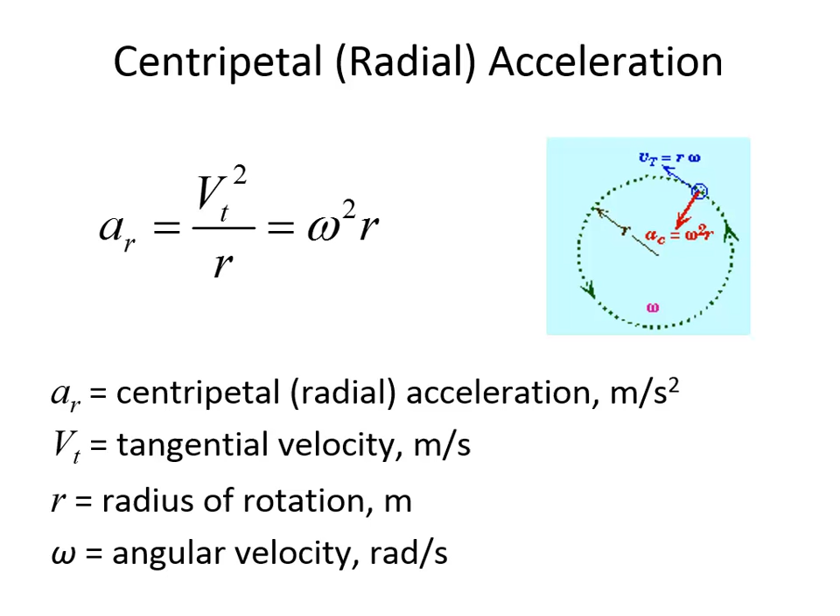What would your conversion from meters per second squared to radians per second be? You're thinking in terms of this earlier slide? We don't actually use the radial acceleration in this problem. In this problem, I have g, the elevation, and then just the radius squared. The radius that we used of 0.1 meters is the radial distance from the axis of rotation over to 2.

Now, we get 22.15 radians per second. If we wanted to convert that into RPM, then we would divide by 2 pi radians per revolution, and then we would multiply by 60 seconds per minute, and that would give us 211.5 RPM. So 22.15 divided by 2 pi gives us about 3.5 revolutions every second, multiply that by 60, and that gives us 211.5 revolutions per minute. So it's spinning around really quickly.

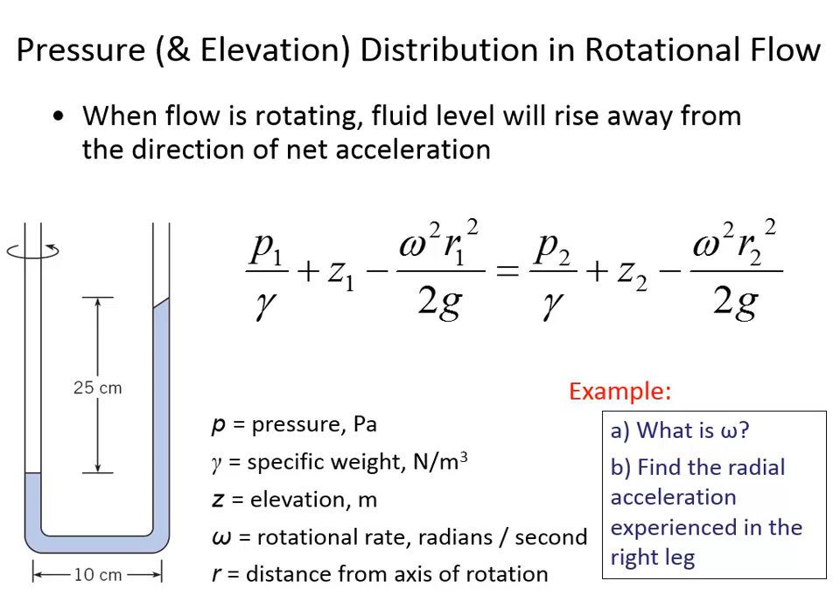Even though it looks like the wind turbines are moving pretty slowly, the radius of those blades is so long, and you maybe have seen them driving down the freeway before, on a truck. They can be 100 yards long easily. At the end of that really long radius, even though it seems to be rotating slowly, the acceleration is really high, and so the reason why it can fling chunks of ice really far and into a house potentially is because the acceleration is really high. And the radial acceleration formula tells us that it's not just the rotational rate, but also the distance from the axis of rotation that develops that acceleration.

So back to these U-tubes. Here's an example I'd like you to take a crack at. We've got an enclosed U-tube. Now this is a little bit different from the open U-tube. Remember, in the open U-tube, what could respond was the water elevation could vary as it was accelerating. Now in this instance, the water elevation is fixed. This U-tube is full of water, and so it starts to spin. And so now the water elevation isn't going to respond to the spinning, but the pressure will.

So I've told you a couple of points that we're going to be selecting. We've got location L and location M, and that's what you're going to select as 1 and 2. It doesn't matter which is 1 and which one is 2. We know that the pressure at L is 2.75 kPa, and the distance from the center of the axis of rotation over to L is 38 centimeters, and then from the axis of rotation to location M is 13.3 centimeters, and then the vertical deflection between the two is 12.5 centimeters.

And so in this case, I'd like you to try and calculate what is the pressure at M, and there's a couple of tripping hazards on this problem. The first is that the specific weight of the liquid isn't just going to be 9810 newtons per cubic meter. It's given that the specific gravity of the fluid is 0.85. So you're going to need to calculate a different gamma for this than the gamma for water. And then the other tripping hazard is the fact that the rotational rate here is defined in terms of RPM, and so you'll need to convert that into radians per second. So see if you can substitute everything that's known into the formula and calculate the pressure at M.

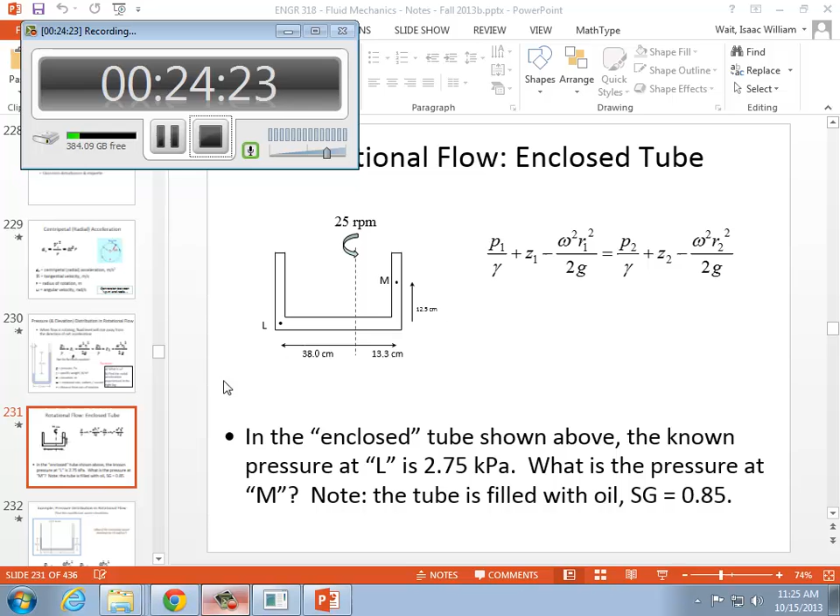All right. In the example, we start off by rearranging the rotational flow equation to solve for P2. Now I've said let's let L equal 1 and M equal 2. And we know the elevation Z1 will be 0, and Z2 will be 0.125, since location M is 12.5 centimeters above location L.

R1 will be 0.38 meters because it's 38 centimeters from the axis of rotation out towards location L, and 0.133 meters for R2. Converting the rotational rate from RPM, 25 RPM into radians per second, it's 2.618 radians per second. Now we can substitute in the unit weight of the liquid here, which is 8338.5 newtons per cubic meter because of the specific gravity that's given, and take into account all the other factors here.

Ordinarily, the pressure would be quite a bit different, because if it was just because of hydrostatics, remember, all we'd have to keep track of is the delta H times gamma to find the pressure difference between L and M. It would just be a matter of delta H times gamma. But here, location L is further away from the axis of rotation than location M. And so part of the reason why the pressure is higher at L than it is at M is because it's deeper down into the fluid.

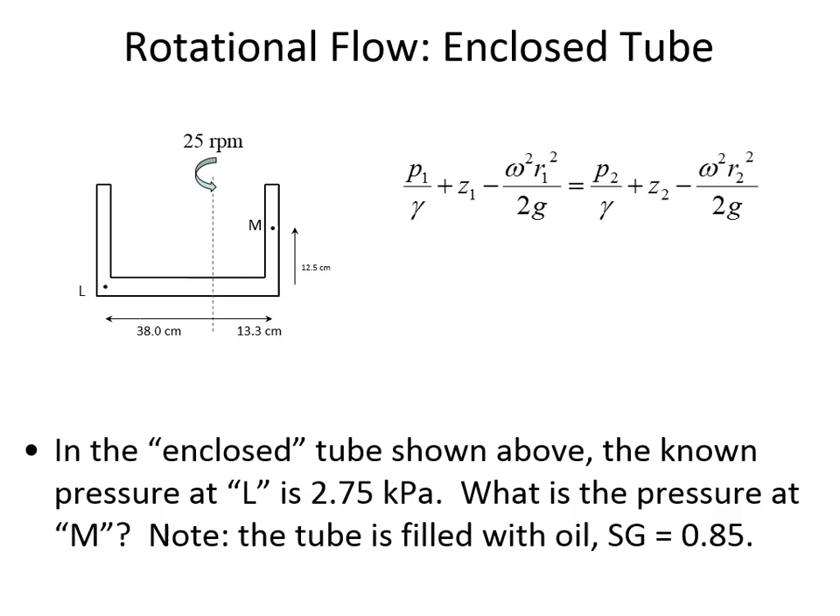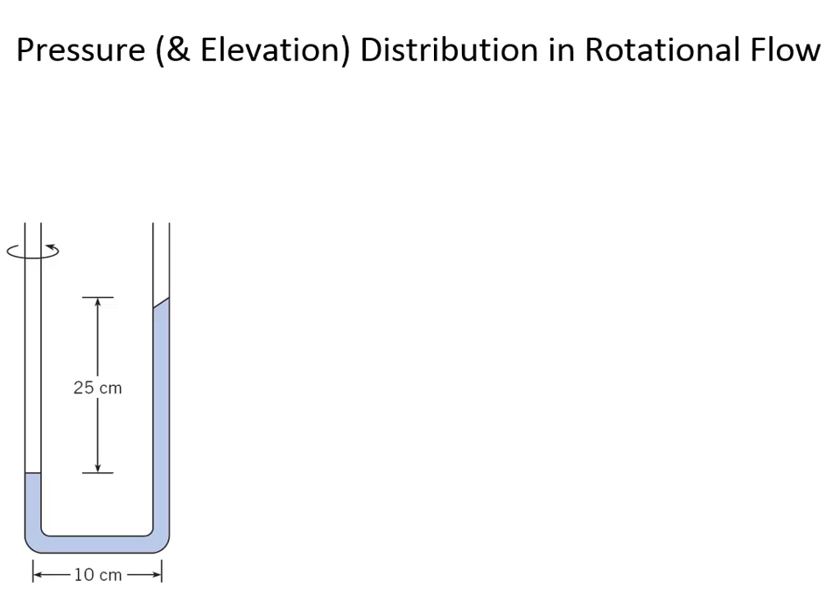So both of these first examples were relatively easy because either the liquid couldn't respond its position, as was the case here, or in the earlier example, there was a certain deflection, but the deflection didn't go beyond the tube's capacity to handle it. In this next example we're going to take a look at, we want to find out what's the equilibrium elevations. And so here the unknown is the Z. It's spinning a certain amount that's defined. Omega is given as 8 radians per second.

And obviously the locations we're going to want to pick for 1 and 2 are the locations where we know lots of information, so we can cancel out parts of the equation. We could choose let 1 be down here and let 2 be there. We could substitute that into the equation, but the problem is that it's not really keeping track of the liquid elevations. What's shown right now is before it starts rotating. The confusing thing is that the picture is showing two things simultaneously. It's showing the before water elevations, and then as it starts to rotate, where the axis of rotation will be and what the rotational speed will be, 8 radians per second.

So on which side of those two legs will the water elevation rise, and which side will the water elevation decrease? So we've got the right would rise and the left would decrease, and that's correct. Why is it that we'll expect the water elevation to rise on the right and decrease on the left? All right, he's noticing that it's further from the axis of rotation out to the right leg than it is to the left. So what? That's my response. So what? All right, so you're thinking about it in terms of what you're subtracting. So if R2 is bigger, then that means that Z1 is going to have to be smaller, right? Okay, good. That's definitely one of the ways to analyze it.

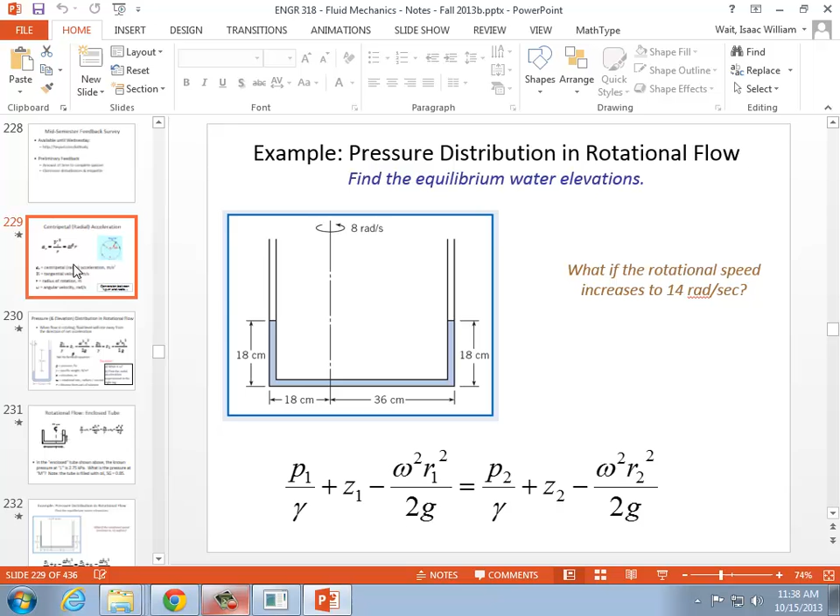Another way to analyze it is to think back to centripetal acceleration and what's the formula for that. In centripetal acceleration, the acceleration is omega squared times r. And the reason why I bring that up is, which one of the sides has more acceleration? The left side of the leg or the right side? It's going to be this. Even though they're both rotating at 8 radians per second, the right leg has more distance away from the axis of rotation, and so this has more acceleration.

And remember, the pressure increases in the opposite direction of acceleration, or the elevation increases in the opposite direction than acceleration. And so if this has more acceleration, then the pressure or the elevation is going to respond in an opposite way to that. And so we want to find out where is the water going to be when it's rotating at 8 radians per second. So here z is going to be the unknown in this equation.

Yeah. Can you think of the axis of rotation as the way it's rotating, so the section to the right there, is that positive? And would that radius be positive and to the left be a negative radius? Because the negative cancels out when squared.

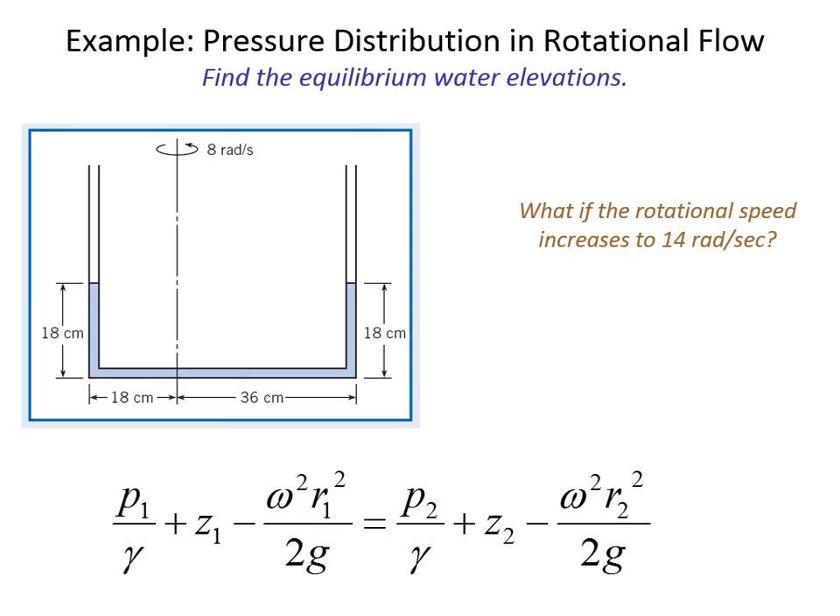Question? So we can't use this Z2 equation for when it's going to be lower than the left side, because that came up with two different answers, which is what I don't understand. So we can only use that when the water level is continuing to be in the vertical leg on the left. Yeah. Once the water level's in the horizontal, then we can't use that anymore, because remember it was assuming that Z1 and Z2 is always going to be 0.36 together.